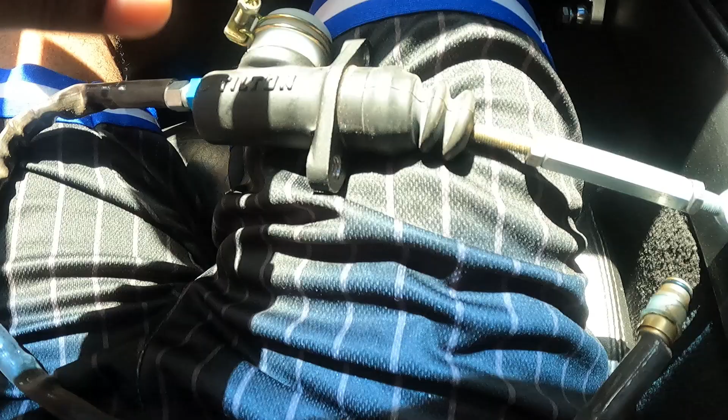Tick clutch master cylinder. I installed it and I took it back off. Stick around and find out why.

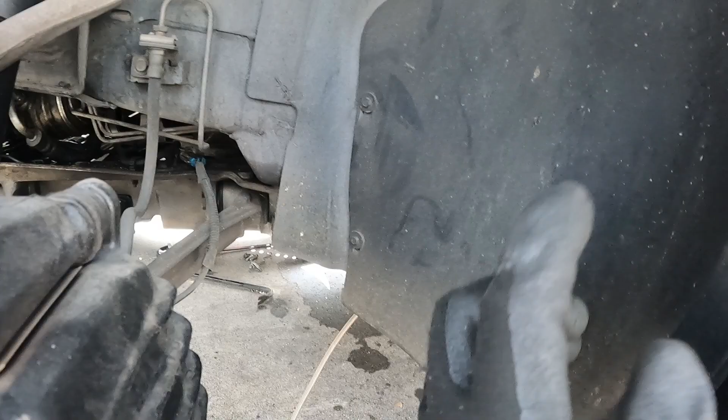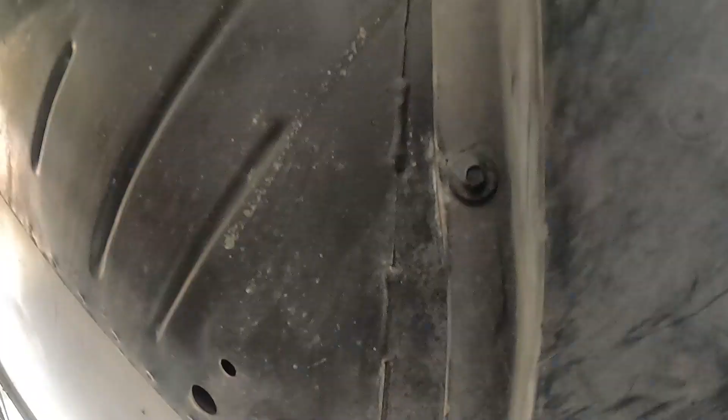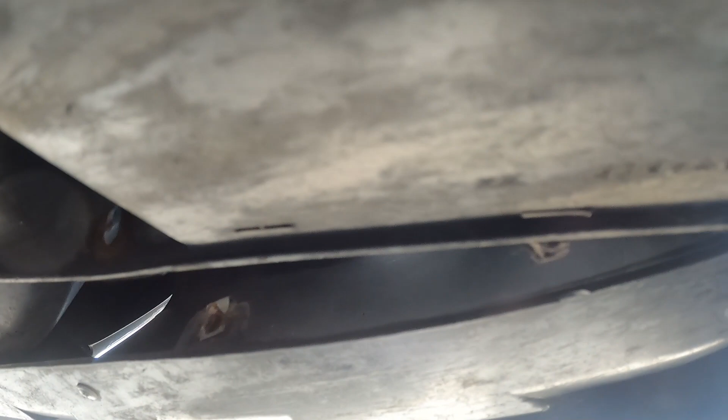The first one getting here is 1, 2, 3, 4, 5 bolts. 7mm. So there's also some under here. We got one. And then one right in here. And it landed on my... boom.

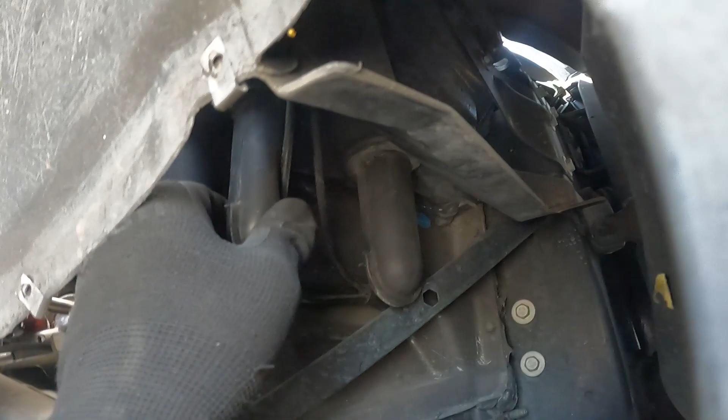These are your drains. So if you ever get water inside, it's more likely because these are clogged. So clear those. But yeah, here is the clutch. We're gonna take this out and put the new one in.

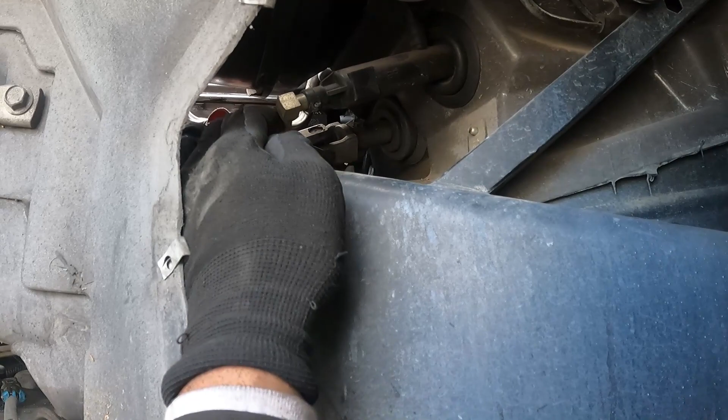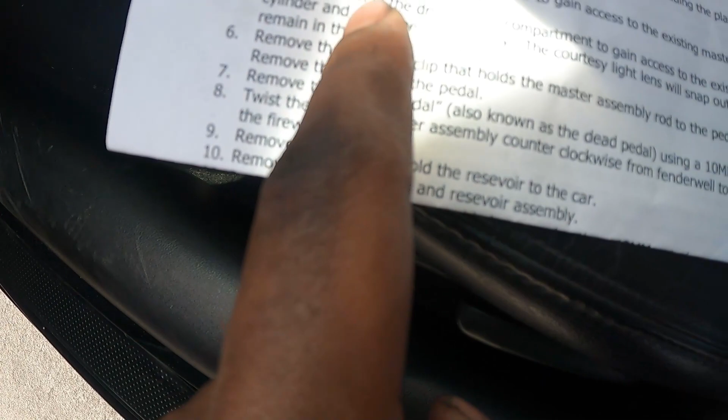Alright. So we're down to remove lower portion, remove panel in the driver's footwell to gain access to master cylinder and your clutch pedal. So we gotta take this bottom part off, but I'm in the street, so it's gonna be hard to film. So you got one clip right here. I got this trim removal tool. I'll hit it with this.

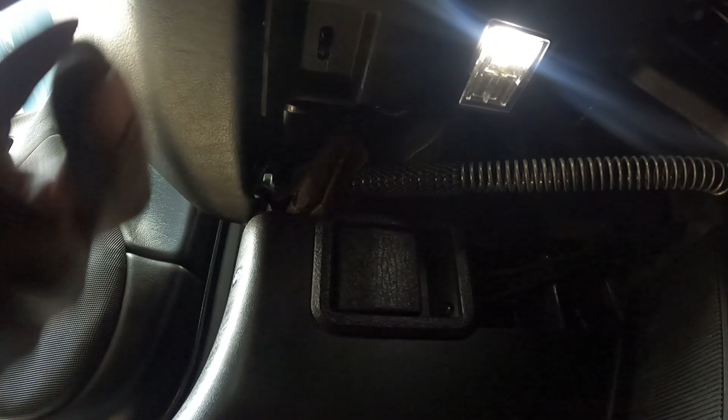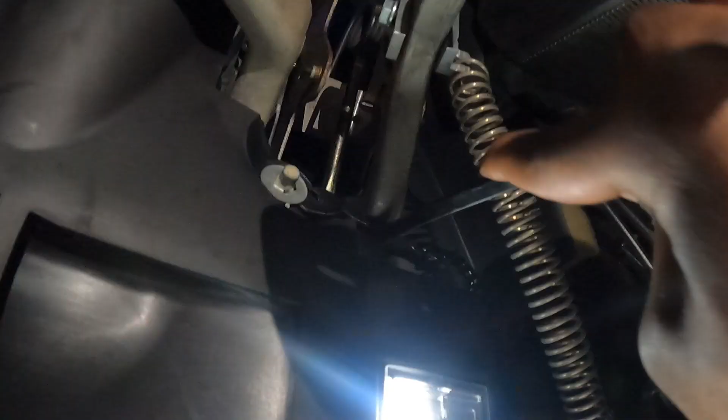That's one. And then there's another one over here. You can't see because it's too dark in here. Okay, so I got one. Got two, and then there's this metal one back here that I don't know how they can get up. I've done this before too, which is crazy. Okay.

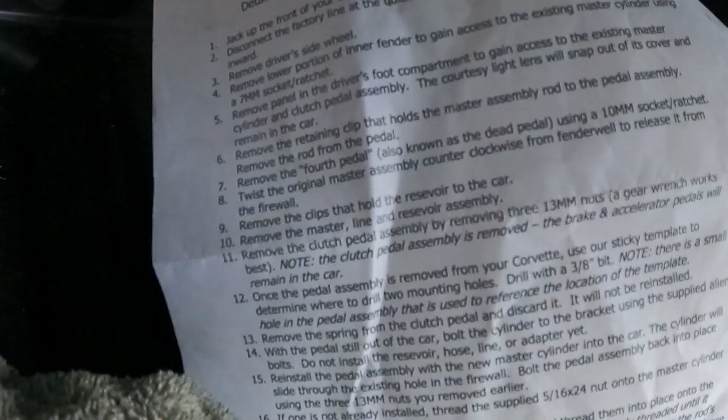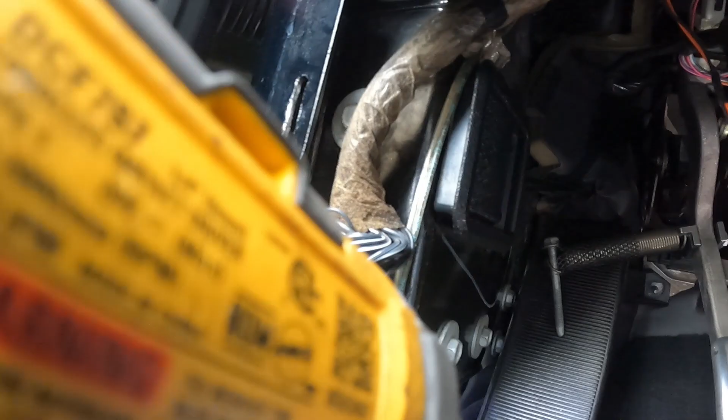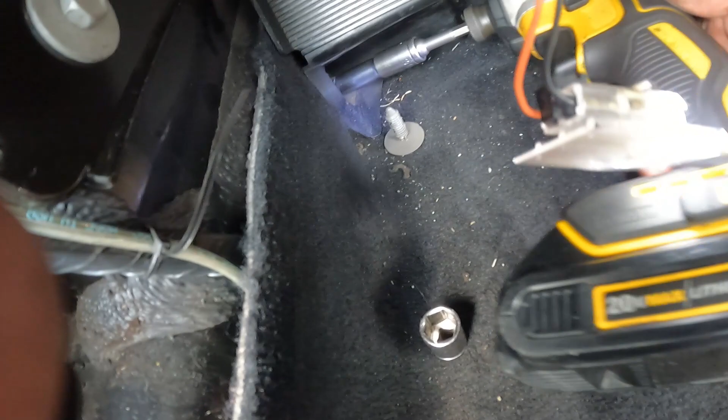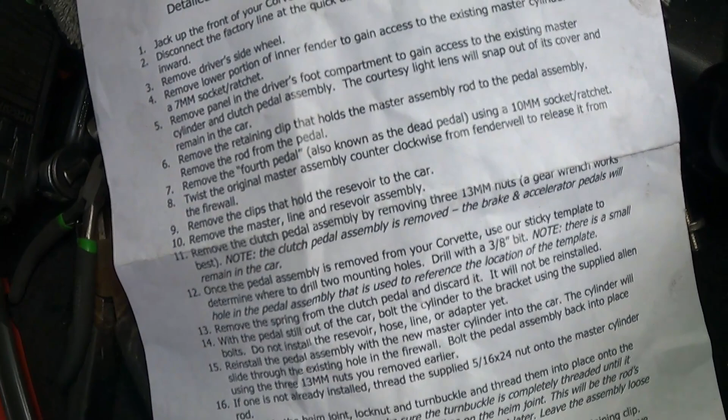Says to twist the master cylinder counterclockwise from the fender well to release it from the firewall. So we go outside. Here we are. Let's see. Pull it out this way. So boom, got this one out.

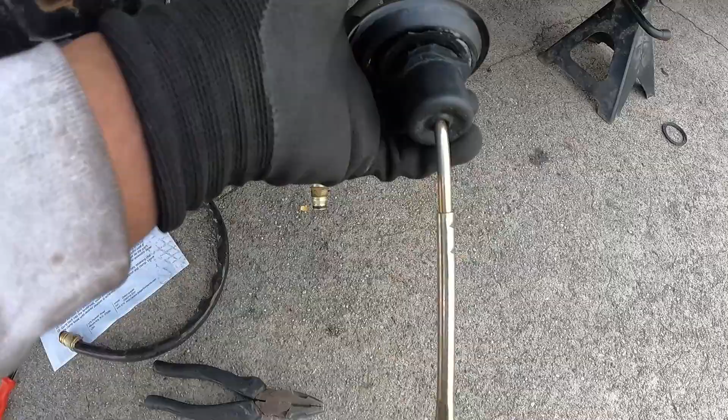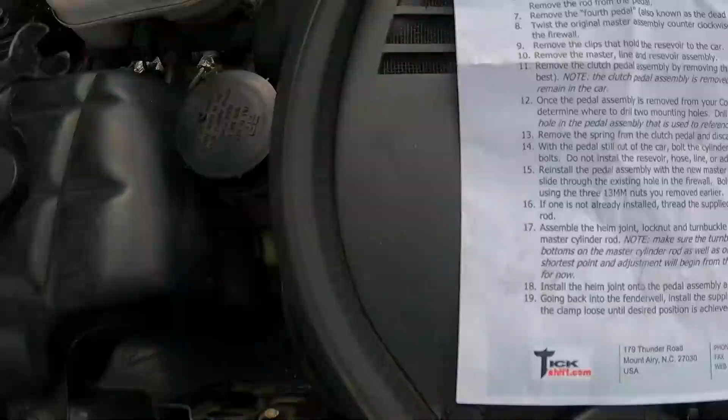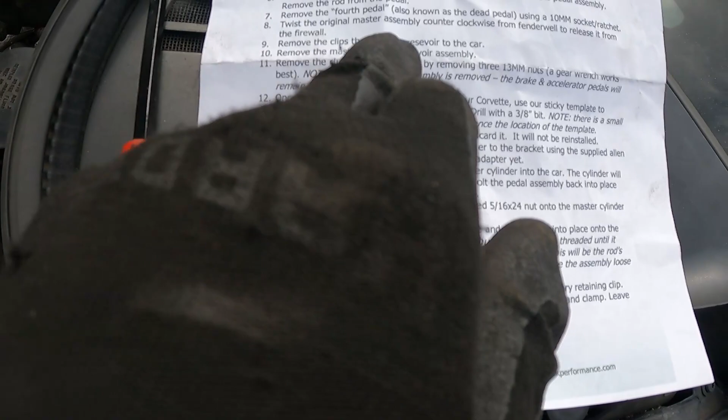I took this off. If you're changing this and not doing a tick, you have to take this off and put it on your new one. But I'm not using that, so let's remove the clips from this. Be careful with your paint.

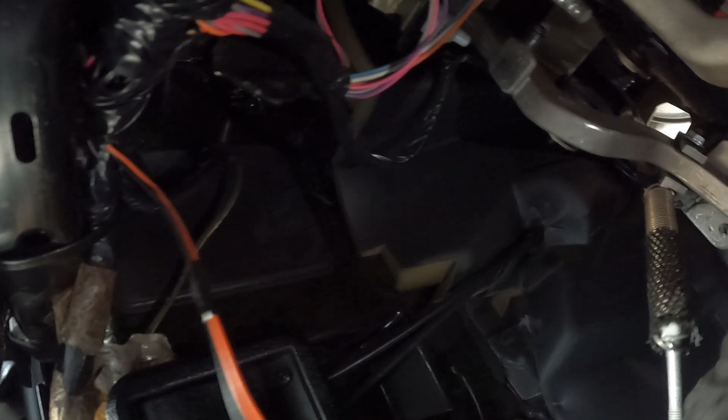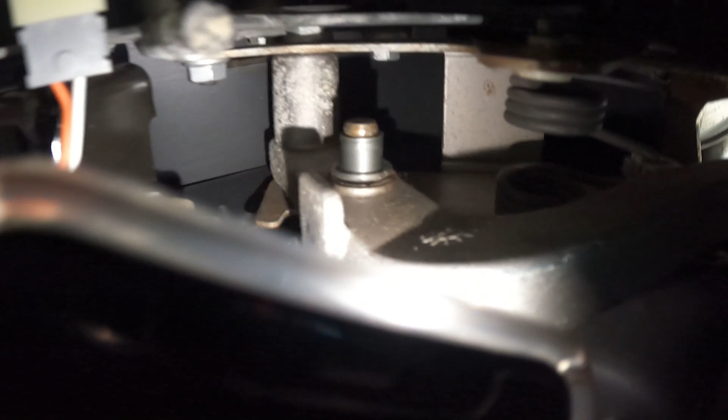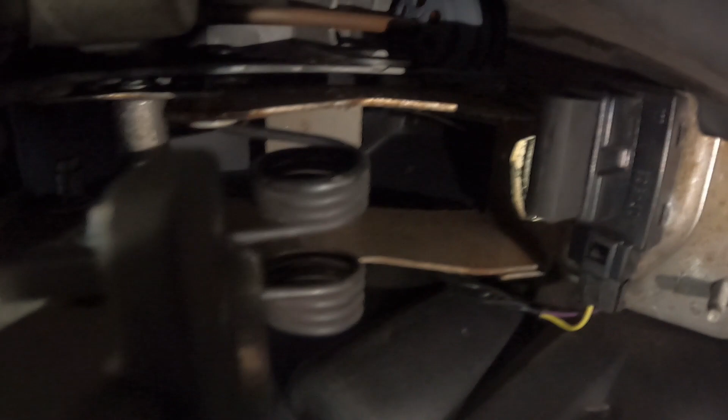Now we gotta remove the clutch pedal assembly from the car, so there's 13mm bolts holding this on. Where they are, I have no idea. We're gonna find out. And I think that's one right there, and then two is gonna be right there, and then the third one, they're all on the same side, so the third one is up back in here towards the firewall. It's hard to see, so... there it is. So there's 1, 2, and then there's one back here.

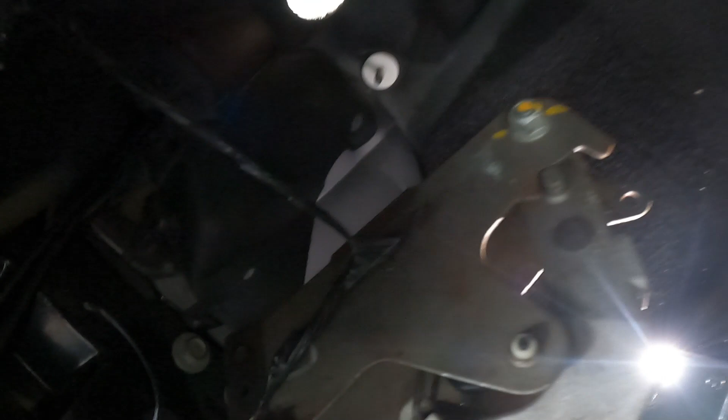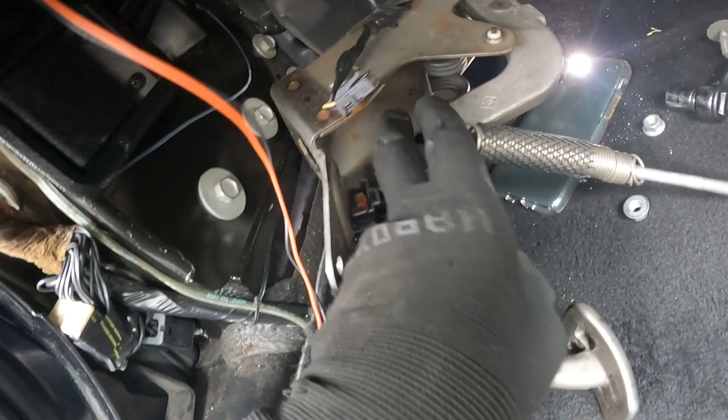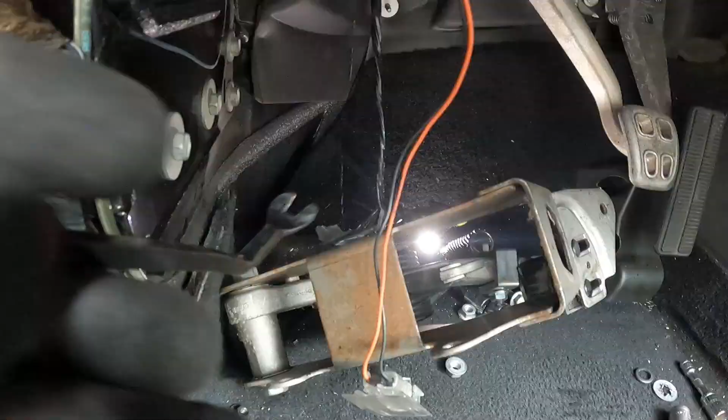So I'm gonna take this clutch, pull the little switch off and see if we can get to it. All right, got the third pedal off, or the clutch pedal. You gotta take off this. You don't really have to take it off. There's a clip right here. Wire. You can trim and remove it. Got that out. Got one little piece.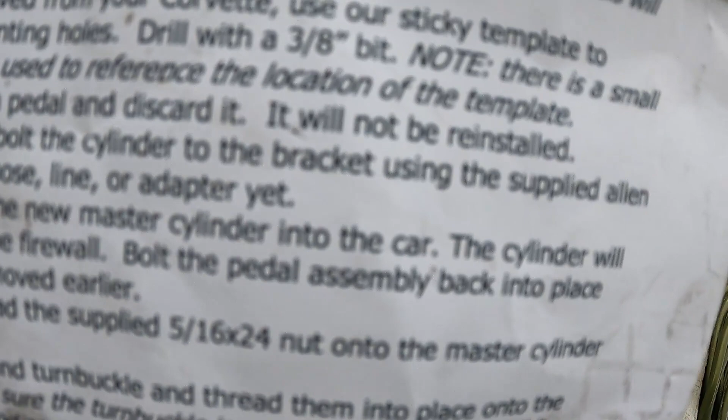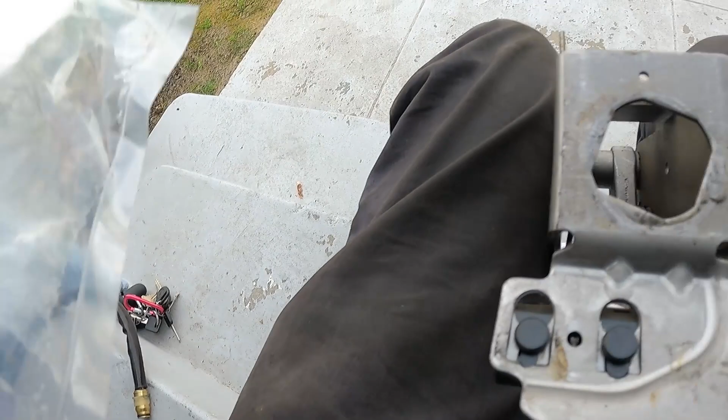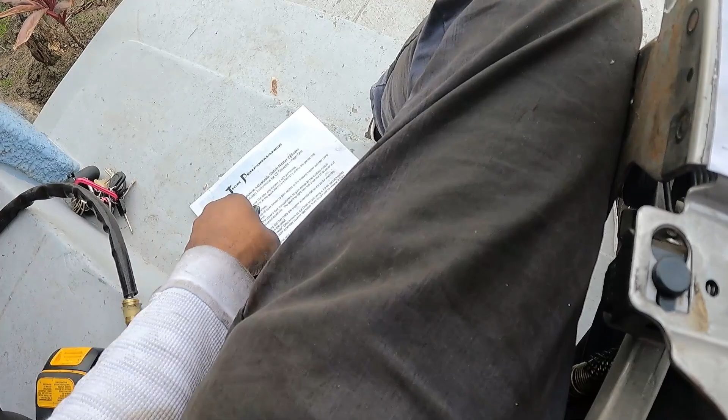Alright, once the pedal has been removed from your Corvette, use sticky template, drill holes, 3/8 bit. Note there's a small hole in the pedal cylinder that is used to reference the location of the template. So it comes with this little template right here. And boom. So definitely gotta get that hole over that. Alright, that's on there. I'm going to start off with a little one, then work my way up to the 3/8 because we got to get these big holes right here through. So, get back to you guys.

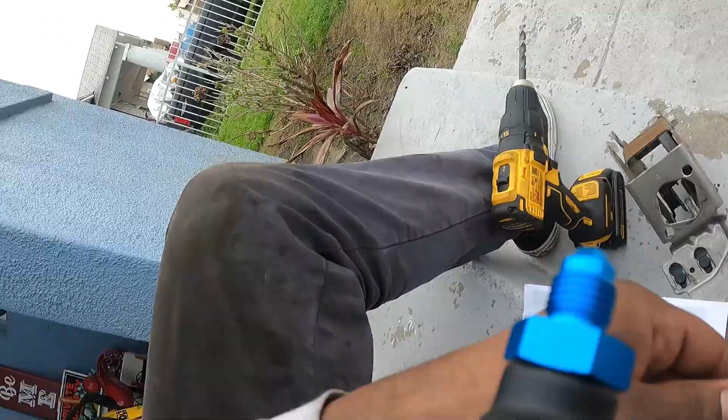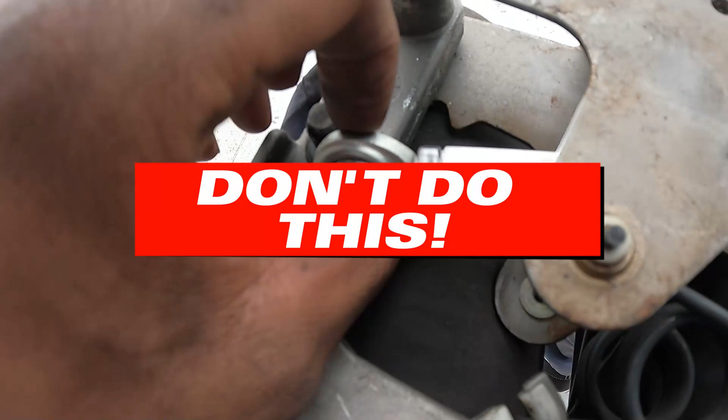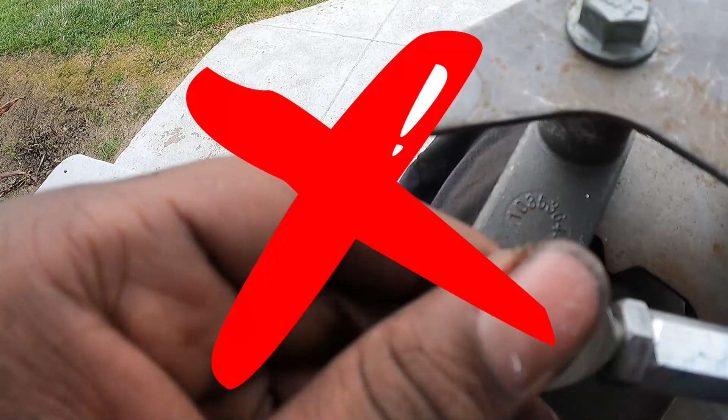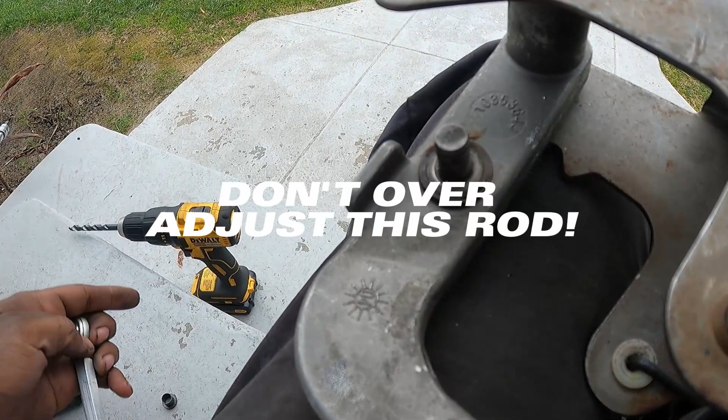Alright, I got the holes. I'm going to route this. Do it from the other way. Boom. And then the bolts come in from the back. Sure you want to back that nut off. Get this, twist it out. So then it meets up with this. So that's it. Check this off. Boom. I wonder if this goes back on.

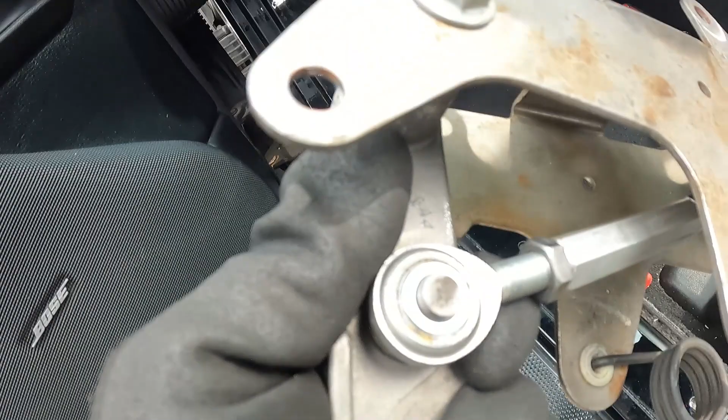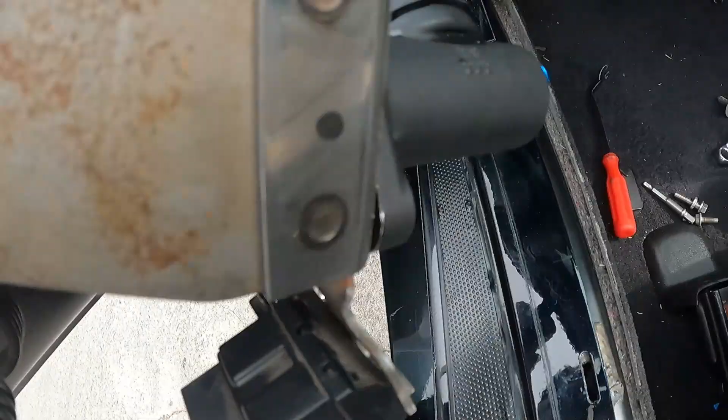Alright, time to put it back in. Got everything situated. I did the adjustment on this already, but I'm gonna pop this off just to make sure I don't push any air in there. Boom, boom. Put this in. Get back to you guys. All right, I got that back in. I had to take out this little thing right here so it can slide up in there. I did take the clutch spring off.

And I took off the rod, the adjustment rod, and just took my time. You're gonna use both hands. You're gonna be in here upside down doing this. It's tough, but it'll get back in there. Just take this off, this little button piece thing right here, and you'll get it.

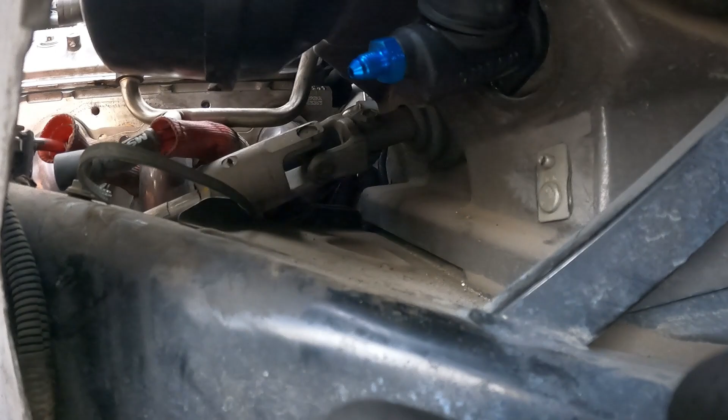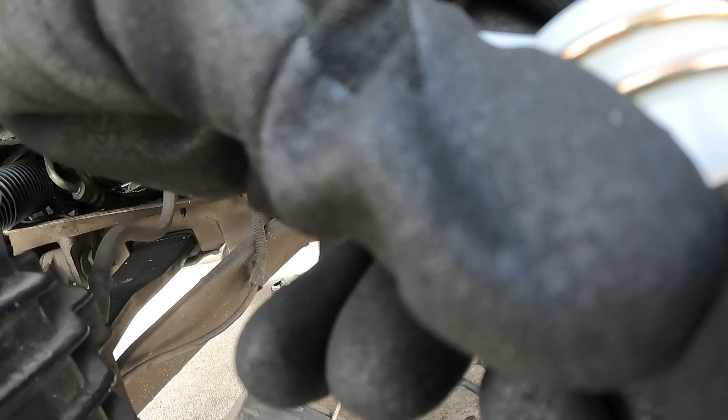So next, I gotta put on the little sleeve on the outside. So boom, we're gonna be putting this thing on. So, gotta take this off, this little rubber piece. And then somehow get this thing on here. See if it moves. This will be screwed out all the way. Boom. And let's see. I'm surprised it's at an angle.

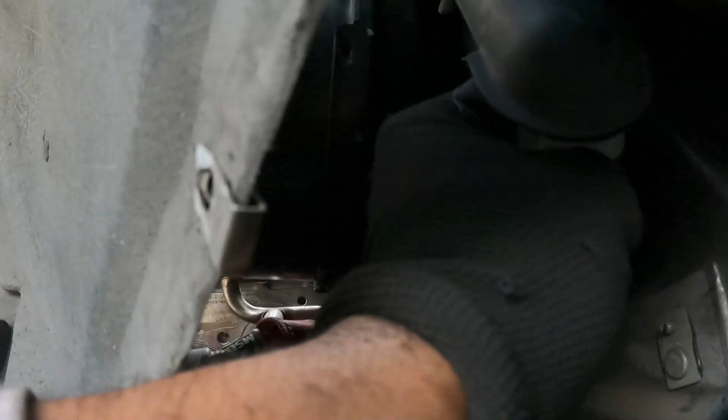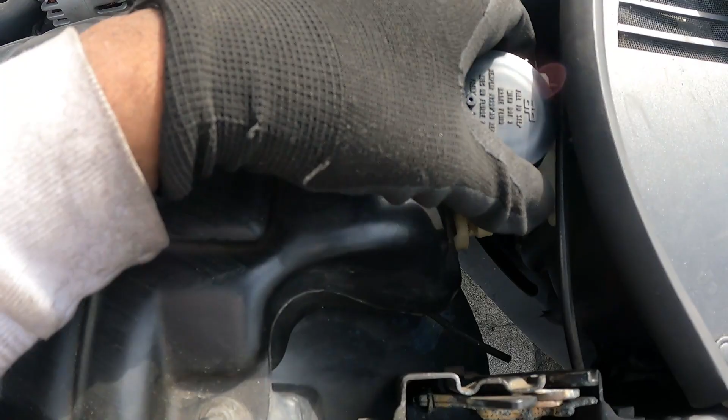I don't know how I'm gonna do this. Okay, back. Alright, that's on there. This is kind of loose. It says leave it loose until you get desired angle on this. So I'm gonna put this back on right here. These two clips. Boom, boom.

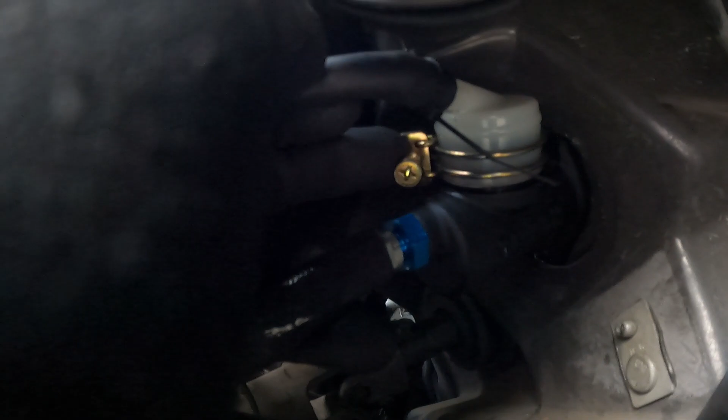Alright, let's skip some steps, but I got this tightened up. Got this tightened up. I got a zip tie on this. Might not be big enough. We'll see. That's right up to here. I'm gonna fill this up. Boom. Let's finish up the

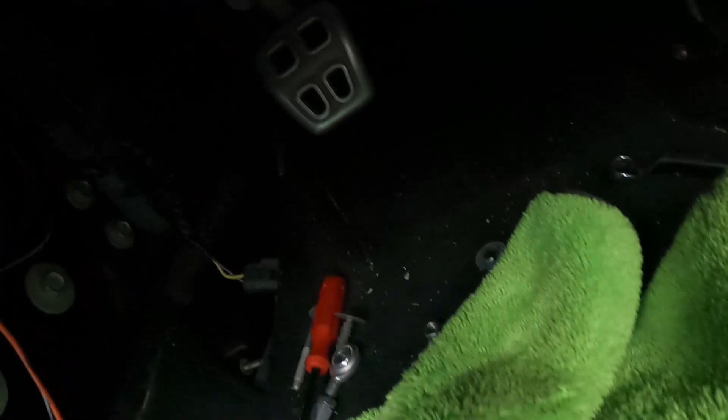side. So in here, I gotta route the pedal. Put the thingy back on. You can't see. Hold on. Okay, you gotta make sure you plug this back in. That's back here. Plug it back in.

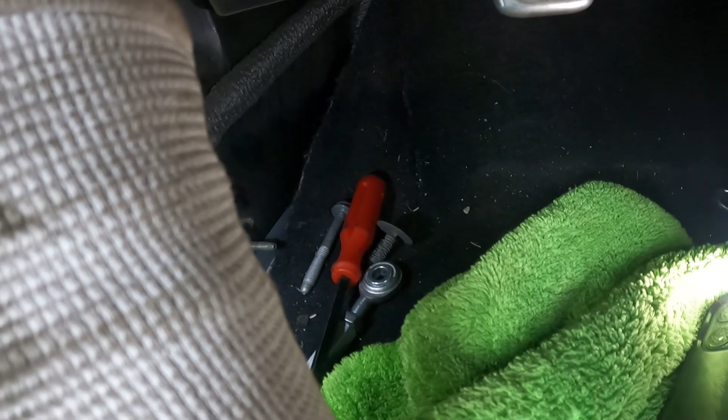This guy back on here, but there's a nut first. I'm gonna put this nut back on first. There you go. Got that back on. So let me get this little clip back on. It goes this way. Not down there.

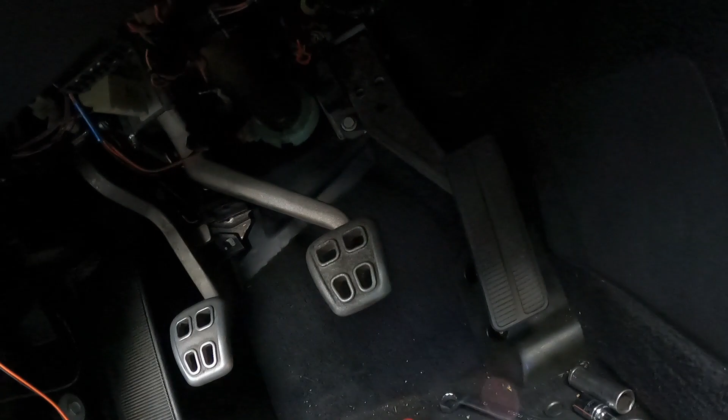Installing the third pedal back, putting those two 10 millis on. So that's on. Get on. And then of course that one down there.

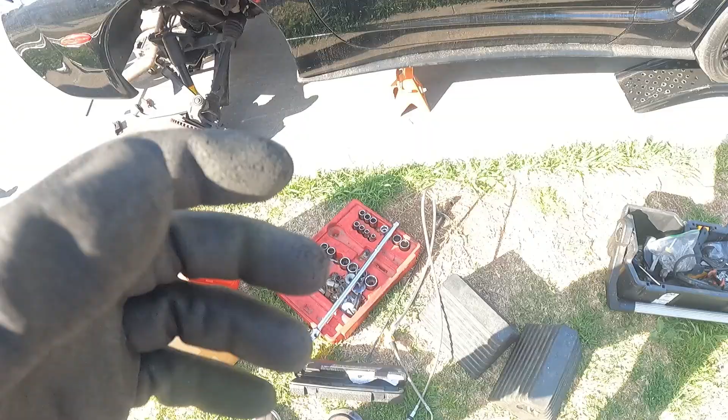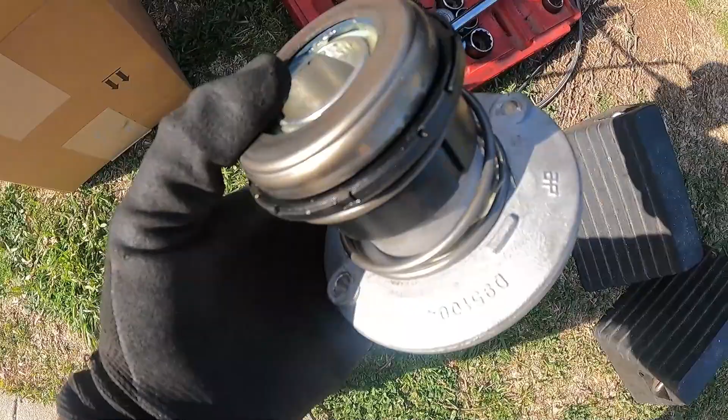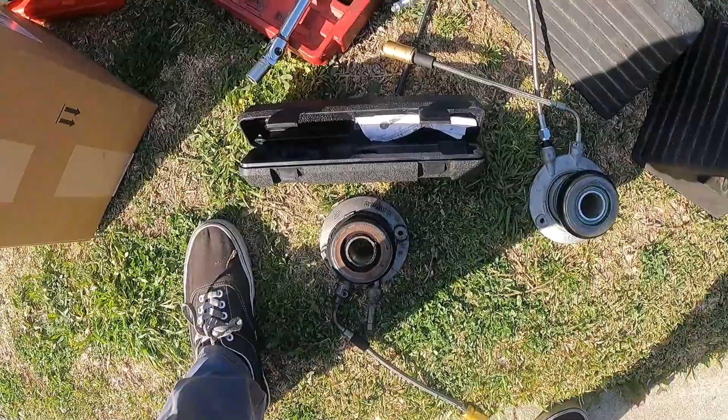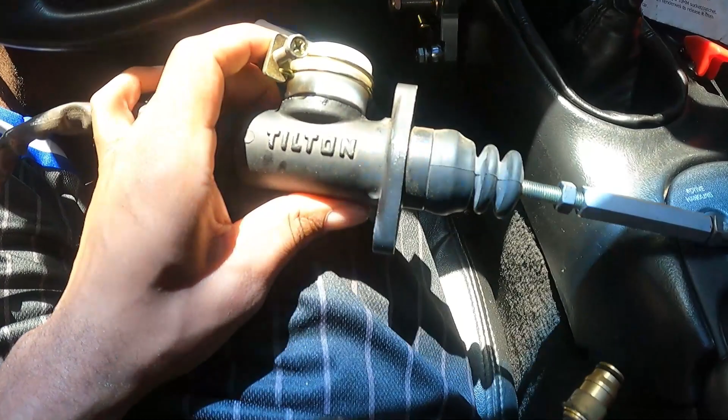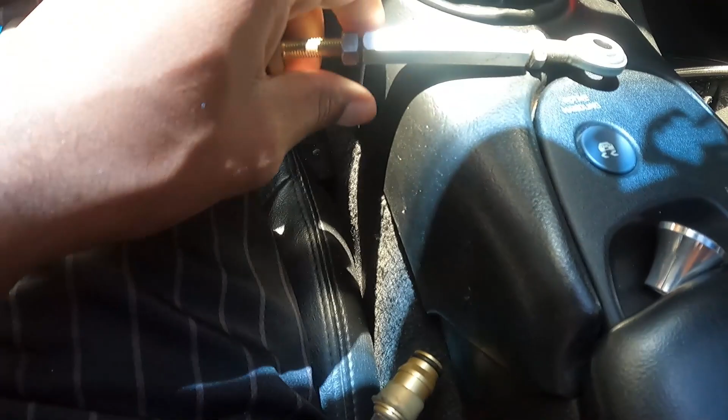Alright, so this is the Tilton master cylinder. I had this on the car. I took it off the car. Reason being, I over adjusted this adjustment rod on the back too high, and I forced too much fluid through my slave cylinder and overextended that. So I took this off.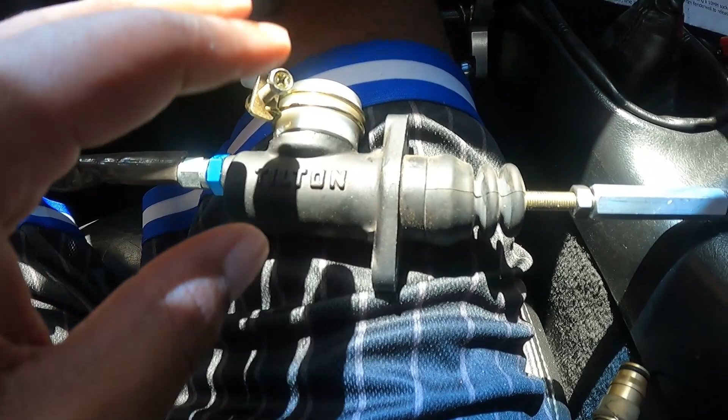Two reasons I took it off was because I didn't like the pedal height. So the pedal height will be lower when you use this Tick master cylinder on your car. It's gonna be about an inch or a half inch lower than your brake pedal. And second reason being because it felt like an on-off switch. There's no easing into your clutch with this thing. It's either engaged or disengaged.

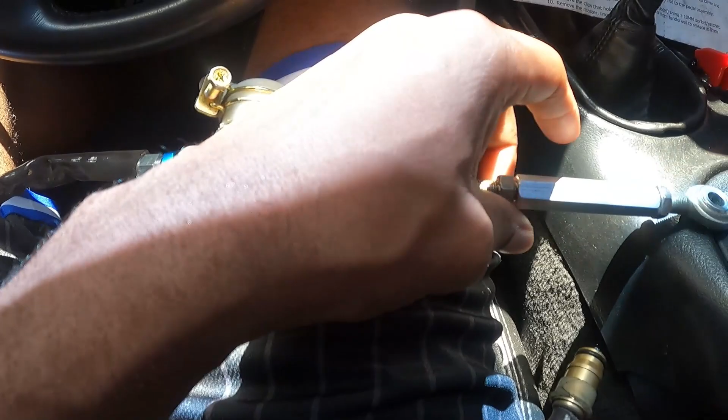So I went through the whole install. You guys probably just seen that in a video. And when I went to bleed the thing, everything started leaking. Of course, I did a video on my clutch replacement. This was a problem too. This remote bleeder line leaked. I can't remember the company of that one. I got a Monster one that has had no problems. Drove to Vegas, everything, that's all good.

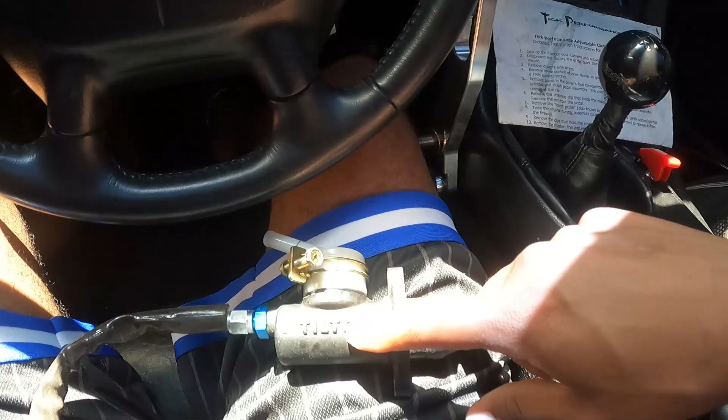So with this over adjustment and clutch disengagement and engagement, I'm keeping it. I'm not selling it because I am going to supercharge this car in the future. And if I have any problems shifting or anything, I'll be putting that right back on. Only thing that scares me is I heard that once these go out, they're stuck and you're stuck. So of course it's new. It probably won't go out anytime soon, but I don't know.

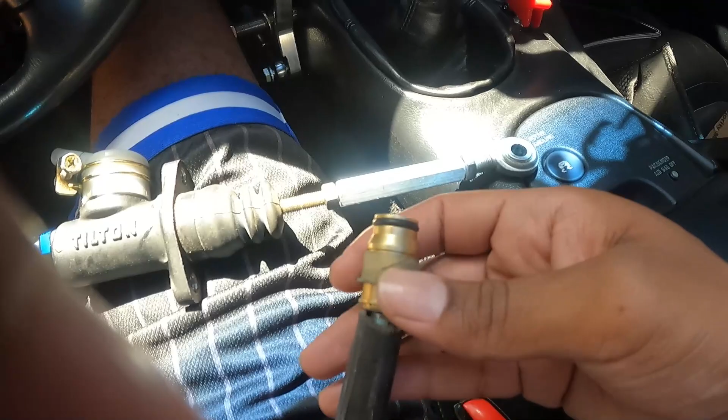But it's not a hard install. The hardest part is definitely this little release right here. So what happened with the adjustment is I over adjusted it and it did that. So the way to adjust this is you start off low and you adjust up until it disengages. Okay, so you unscrew, you get in the car, try to move the car. If the car doesn't disengage, move it up just a little bit more. Keep adjusting that, and then when you're done, tighten up the nuts.

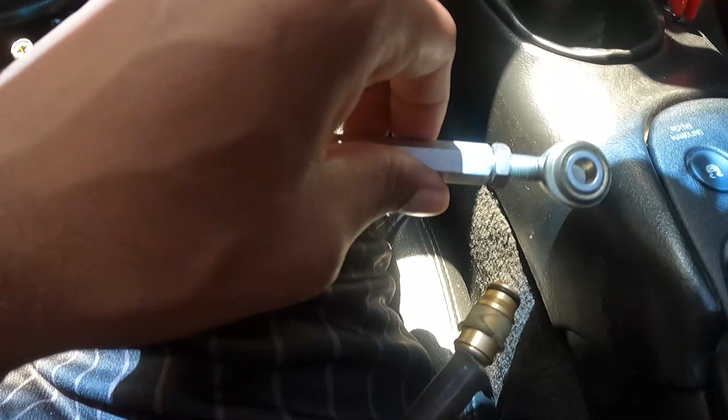Make sure you do not over adjust this. I can't stress that enough. Don't over adjust this. Good product, just didn't like it for me, but I am keeping it just in case.